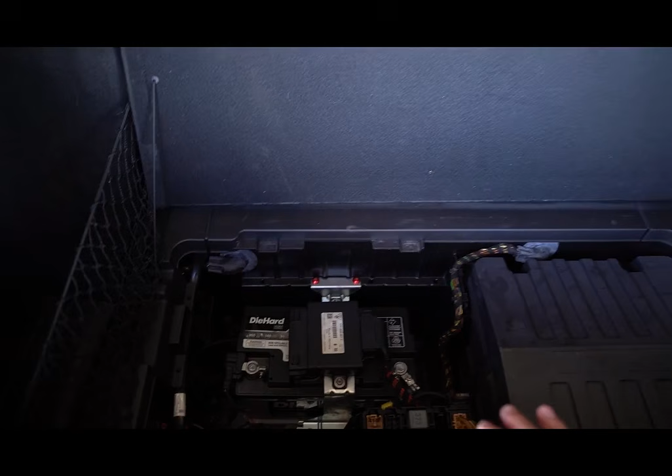Alright, so back here in the back, you're going to want to grab all the information off your battery. You're going to want the AGM information, you're going to want the cranking amps, you're going to want to get the serial number and manufacturer information all off of your battery before you get it in there. If not, just pull it back out, grab all the information you need, or take the top piece off.

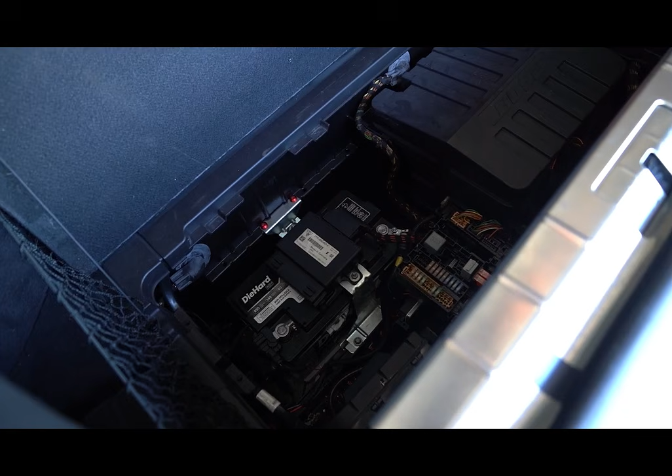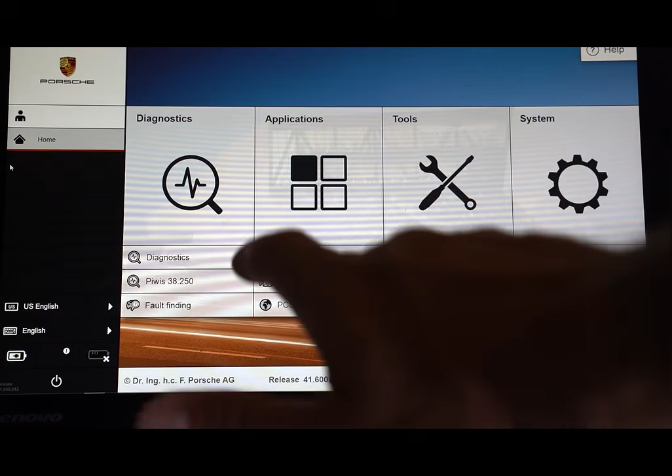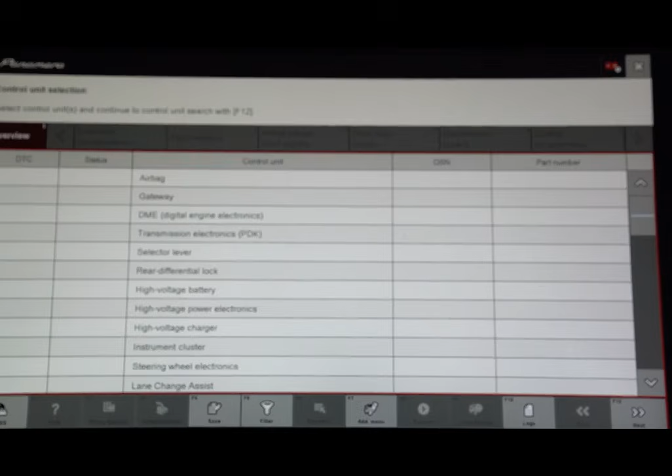But here we are, we've got our system all hooked up. We're going to go ahead and log into the PIWIS-III. So we're going to go into diagnostics. Alright guys, so we just recognized the 970. We're going to hit continue. Going to hit gateway, maintenance repairs. We're going to click F11 and just do no.

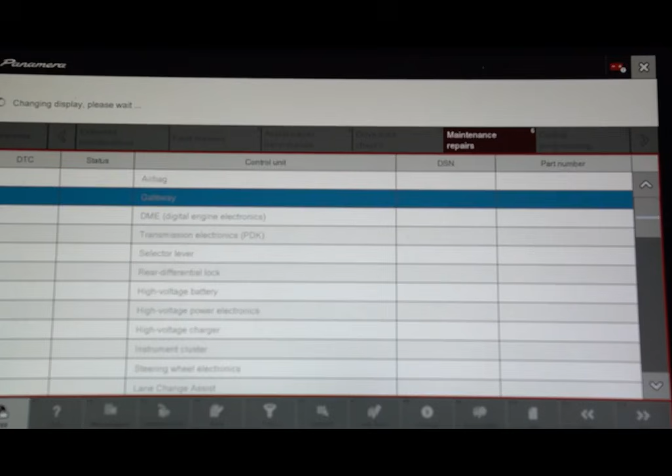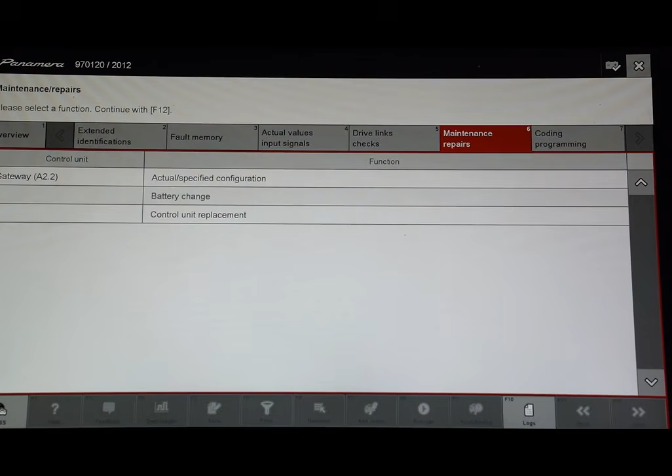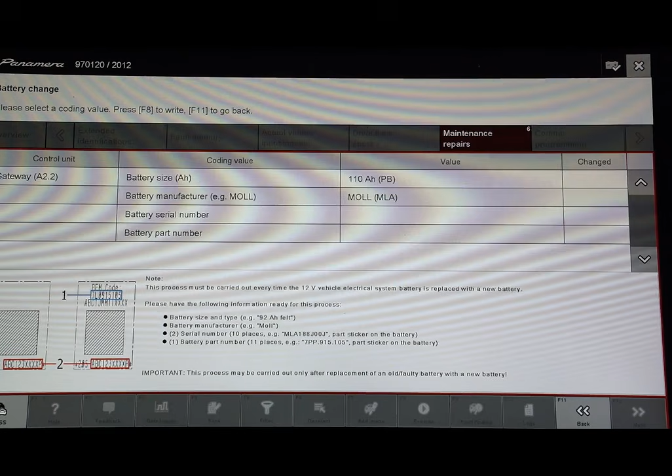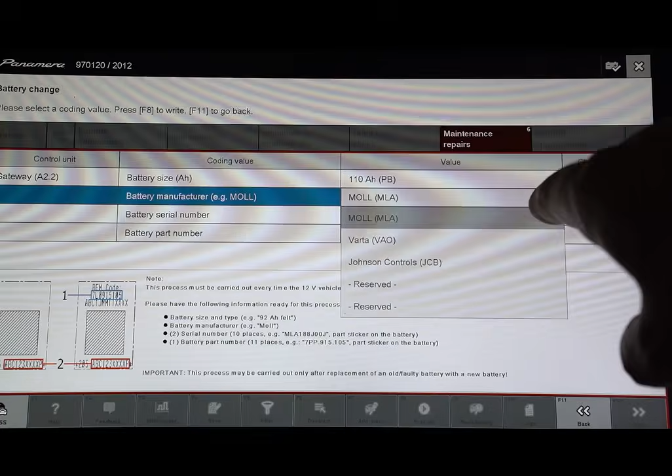Alright guys, so once you finally get in, you're going to go in here and go to battery change. We're going to hit next, F12. Alright, so this is the area that you're going to go in and start making all your changes. So you can actually click into this box and pick which AGM battery you have. Click in here for the manufacturer. Battery serial number, battery part number.

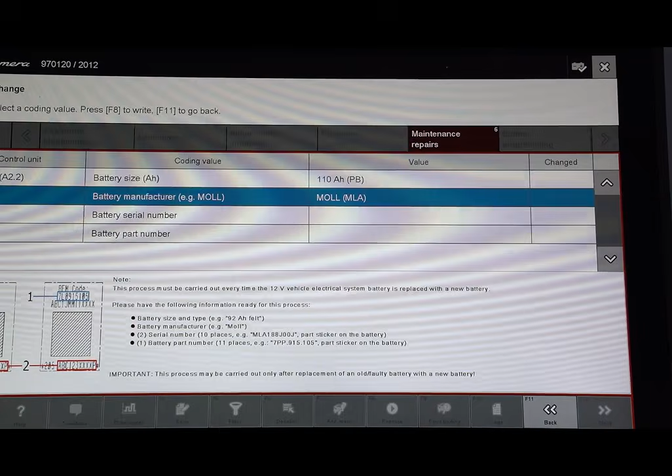So once you get in here and change everything, you're going to press F8 to write it. Once you do that, you can hit next, and that will take care of everything that you need to do to program your battery into your Porsche.